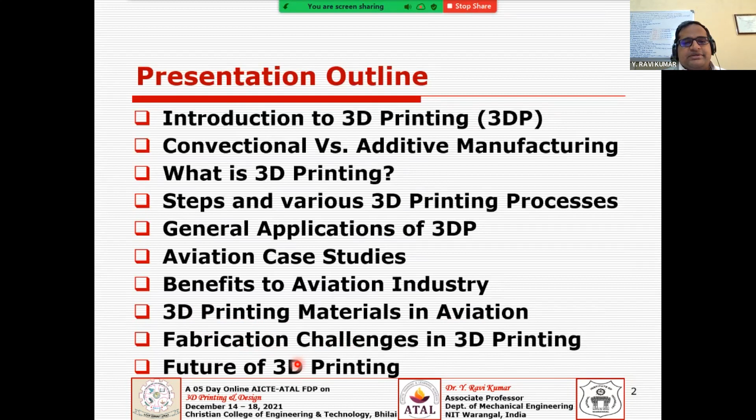And let us quickly understand the importance of this 3D printing, otherwise also called additive manufacturing, and where it fits. So right now we are in Industry 4.0, and Industry 4.0 is all about cyber physical systems and digital twins, where you are trying to replicate your physical facility, how closely you are replicating your physical activity virtually, with more emphasis on the mass customization of products.

So how are you going to achieve that through Industry 4.0? Of course, you do have certain tools to encompass cyber physical systems, mass customization or the digital twin concept: technologies like autonomous systems, cloud-based computing, system integration, simulation, IoT, that is Internet of Things, augmented reality, big data analytics, and cybersecurity or blockchain technologies.

Before we start that, let us quickly compare conventional manufacturing systems versus additive manufacturing systems. Conventional manufacturing systems start with subtractive manufacturing practice like CNC or machining, where

you need to start with a bar stock of material which is in excess of the product that you're looking at, and keep on removing material by using various tools, ultimately ending with the product but with huge scrap or wastage. During this course, we sometimes need to design a fixture to hold the work from the bottom.

We need to look for the logistics or supply chain to produce these components—placing the order for material, tools, jigs, fixtures, and so on, plus CNC programming. The most important thing here is the complexity of the product.

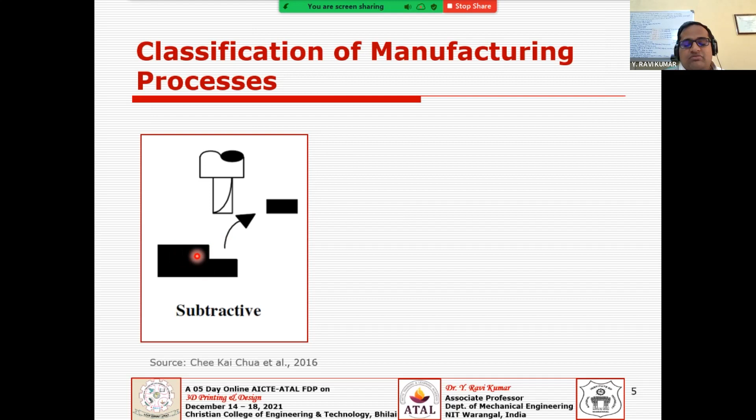If your product is simple, like a step kind of structure, it may not be much of a worry. But if you change your design from a simple step geometry to a more free-form, coffee cup kind of geometry, and you wish to do it in a subtractive manufacturing process,

then you need a big block of material, and you need to look for tools that are deep enough to machine this and remove the material, and what sort of tool it should be. We need to look for several requirements on the tooling side, and we need more than 3-axis control to accommodate this kind of undercut.

That is another constraint—what kind of controllers you are going to use, whether 3-axis, 4-axis, 5-axis, 3.5-axis control, or whatever. You have to worry about this whenever you have an undercut like this.

We need to look for a jig or fixture to hold the part from the bottom to machine it. And if you have a very sharp internal feature, it cannot be machined without tool radius compensation in your CNC program, and so on. So we need to account for all these constraints.

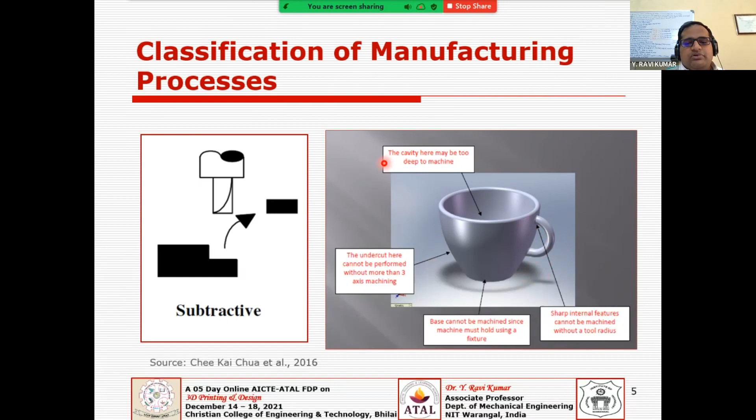But if you come to an additive manufacturing practice, you may not be much worried about those constraints—right from the wastage to the complexity of the geometry. So you can very well work with it.

You are reducing your three-dimensional complexity into a 2.5D dimension complexity—meaning the complexity here is reduced by one dimension, or half a dimension. Then you could even literally remove the wastage, or produce with no wastage or less wastage, able to produce any complex shapes.

So you keep on adding material in a discretized, layer-based manner. You are going to add the material.

So then you may come across other manufacturing processes like a formative process, where every time we need to design a mold or a die of the same shape as the part. Again, you may adopt a subtractive process to fabricate these dies, die inserts, or molds. So it may again rely on subtractive manufacturing.

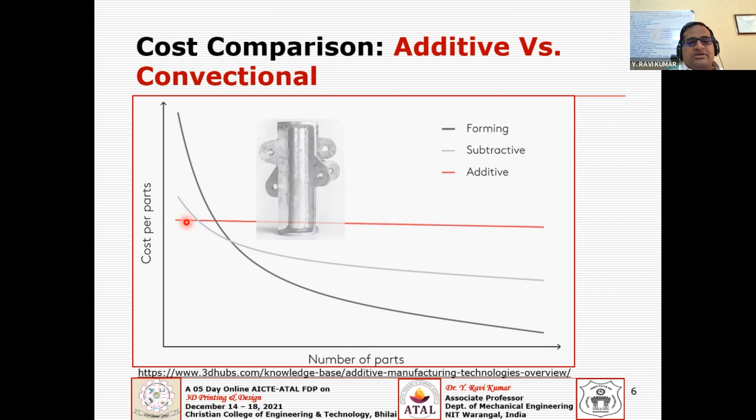So if you have a product with standard circular, cylindrical, and filleted features, it might be done through machining, or welded or done separately and joined, assembled, and ultimately you get this part. That's fine, and it may be very encouraging for conventional manufacturing methods.

But your designer has changed the design from the conventional, ordinary, standard analytical forms or shapes to a more bionic or nature-inspired design. So you may doubt, why do you want to change the design? We are comfortable with this design. Why change it?

Design change is needed very much for adding more value to the product, in terms of functionality and performance. We need to emphasize improving functionality, and even work on other aspects like weight optimization or shape optimization, but the most important thing here is the functional aspect.

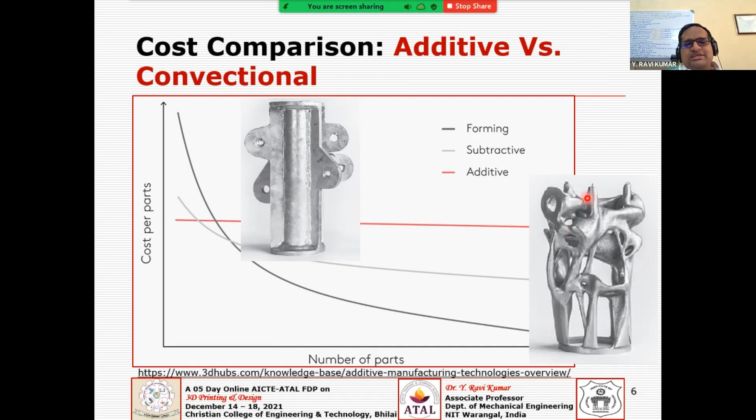But this is where additive manufacturing or 3D printing shines—the cost remains the same whether the complexity has increased to 4x or 5x times. That is the beauty of this technology, as common sense would tell us.

Is it only the cost benefit you get out of the additive manufacturing process whenever you are working with complex products? Not only that, it will also enable you to achieve added value or improved performance of the existing system.

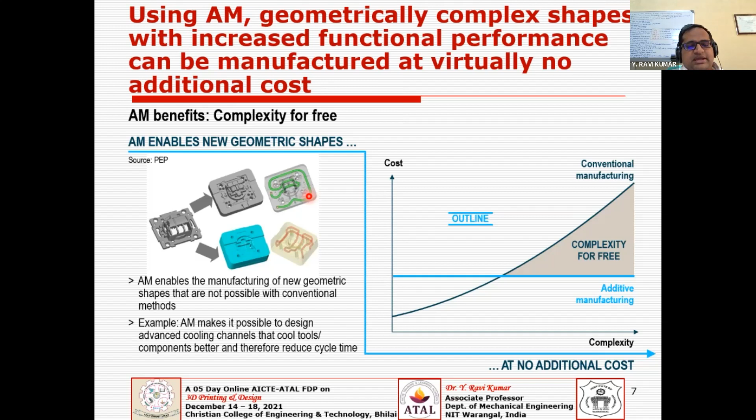That is the more important thing we need to understand. Without any additional cost, you're able to increase the performance of the existing system. That is the capability of 3D printing.

You may wonder, can it be applicable for all circumstances? Wherever you have much more complexity in the product and relatively lower quantity needed, your 3D printing may be the right choice or the best choice. But if you are looking for medium complexity and medium quantity, CNC may be the right choice.

And if you are looking for less complex products with good quantity, you may go with the investment casting procedure to select your method. If you are looking for medium level complexity and high quantity, you may go with the injection molding process.

But there is a bit of collaboration or integration that may also be possible. You can integrate 3D printing technology with the injection molding process, by making an injection molding die or insert directly with 3D printing technology.

As we discussed, conformal cooling channels can also increase the existing performance of the system. It could even be integrated with investment casting, where you can make complex patterns or wax patterns very much needed for investment casting applications. That's the way you can integrate this technology.

Right now we'll focus on the aviation or aerospace industry, how 3D printing is going to play a vital role. Before we start, let us quickly see the mantra or principles, or the unique capabilities of additive manufacturing or 3D printing over traditional or conventional manufacturing methods. The first mantra is undoubtedly, as we just discussed, manufacturing complexity is free.

We have just explained the product with this. Otherwise it could have been a cylindrical object. This may be one of the structural members in one of the structural applications. But here the idea to change the design is to accommodate much improved performance over the existing or traditional design. Because of that, it becomes unnecessarily expensive in conventional manufacturing methods.

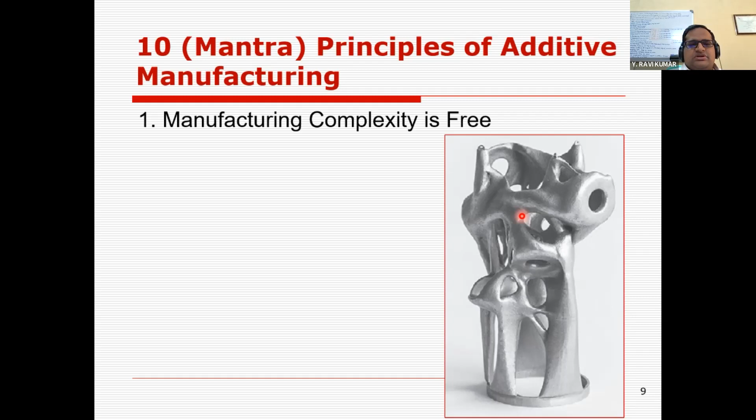But that will be easily tackled here, whether you are making a cylindrical form or you have derived this in the most bionic way of designing it, a nature-inspired or more organic form. It doesn't care whether you are making a cylindrical form, a free form or the most complex form. So your complexity is totally free. That's what we are talking about. And of course, variety is free. What do you mean by that?

Say I have some 100 components, but all 100 components are different size, different shape, different form, and none of the components are matching. If you go with traditional manufacturing methods, we need to talk about CNC. Then we need a different program, different tools, different fixtures. And there will be huge logistics involved in fabricating this, varying from one part to another.

But the biggest beauty here with additive manufacturing is that all these components are made in a single setup, in a single go; it doesn't care what kind of form you are making. Why? Because you are going layer by layer, and you are not driven by the constraints of conventional manufacturing. So your designer's mindset should now inculcate a kind of additive nature. It is quite a contradicting scenario of additive and subtractive, as the names suggest. But we will try to explain that with some case studies.

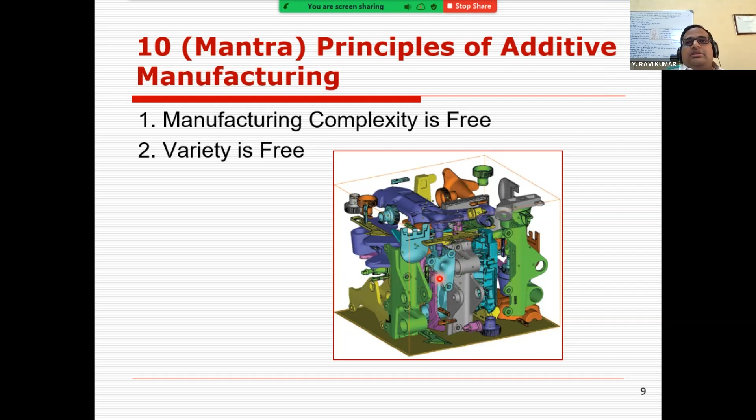But the thing here is that variety is free. Whether you make one geometry or totally different ones, that's where your magic lies. So part variety is free here. That is another mantra. Or the biggest advantage, as we are talking about: no assembly is required. You can take say 12 components and make them as a single part, where you don't require any assembly at all. You can consolidate the part count. So it doesn't require making 20 or 30 parts separately and assembling them.

The difficulty in assembling, the manpower involved, the resources for a separate assembly station or robots, depending on automation. Here you need not invest that much money in assembly; you just make it as a single part. That's another mantra. And then you have zero lead time. What do you mean by this? You don't have the big supply chain or logistics of conventional manufacturing. You need only the digital inventory, the designs, but no physical inventory. So you can reduce your lead time; it's almost zero lead time manufacturing, avoiding the disruptions in supply chains and logistics of conventional methods.

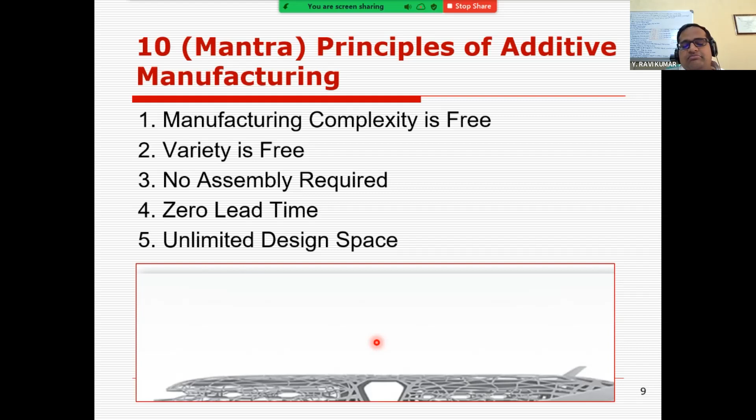And of course, you have unlimited design space, as your designer's imagination should not be a hurdle for the manufacturability of the component. Say your designer has come up with a nature-inspired design; your manufacturing system should not be a hurdle to fabricating it, where your designer has out-of-the-box thinking and comes up with better performance than the traditional design. Undoubtedly you have a lot of design freedom, unlimited design space. And of course, it is zero skill manufacturing.

What do you mean by this? In conventional tool making, or even CNC technology, we need to train people on these sophisticated machines, programming, tool making and all that stuff.

But here the magic lies much on the design side, and the manufacturer's skill is not much needed here. If you contrast with the conventional manufacturing systems, the manufacturer's skill may not be much required here; the focus is on the design aspects, and that design should be in tune with the capabilities. That's what we are discussing. At every part of your design, it should be understood whether you are going to exploit these unique capabilities in your design or not.

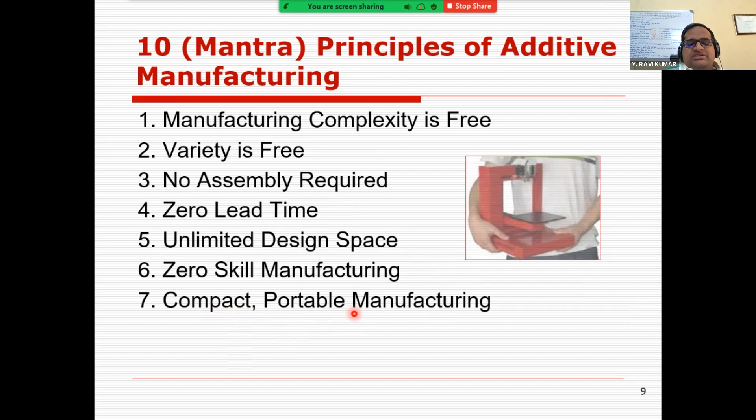And this technology gives an opportunity for more compact, portable manufacturing. You have more compact machines, or printers more compact in size, and you can carry these printers to your place. It's not restricted by your casting lines or shop floors, where we need huge equipment and where you need to go to that place to perform it. But here there is a lot of democracy in printing, fabricating or manufacturing. You can sit relaxed at home and still perform your fabrication process.

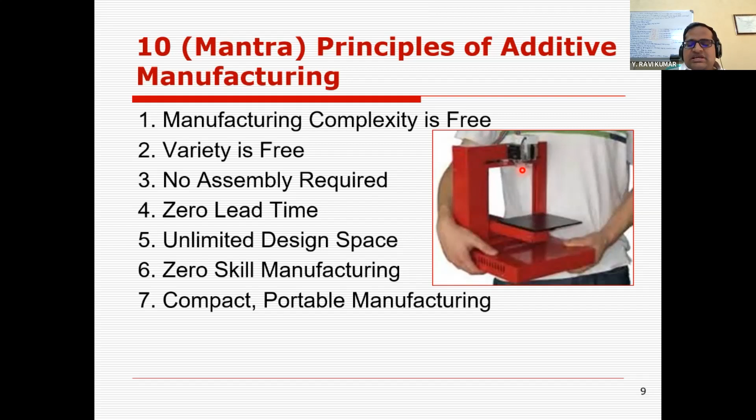So it has a lot of freedom, or democracy, in manufacturing, and less wastage of byproduct. You can have zero wastage or less wastage in manufacturing these components. That is another advantage, literally zero wastage of the byproduct through additive, and infinite shades of the material. This is quite interesting if you contrast it with conventional manufacturing methods.

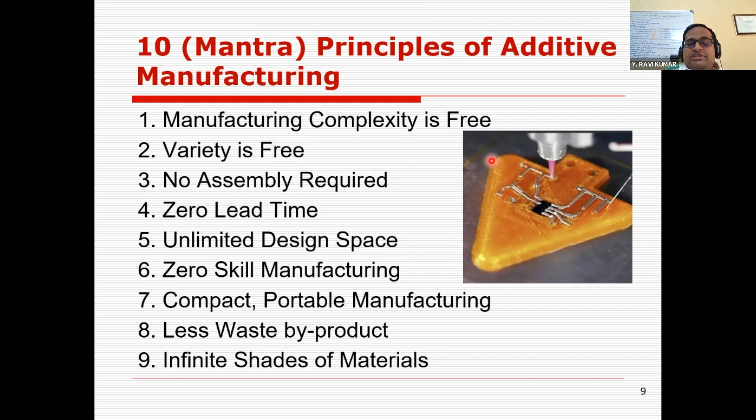You can even fabricate circuitry and non-circuitry material in a single setup, or you can vary the composition, or fabricate a functionally graded material which performs different functionality at different regions within the same component. That is also quite interesting. So you can go with the infinite shades of the material. That is another mantra, the unique capability of additive manufacturing compared to conventional manufacturing methods.

And now we are talking about Industry 4.0, and how precisely the physical replication is done from the virtual, meaning the digital twin concept in Industry 4.0. So it is definitely moving into digitalization of your designs, integrated with the physical world or physical replication, and you can even integrate digitizing technologies with 3D printing. So you can get wonders, or come out with the best outcome, if you integrate these technologies in your manufacturing practice.

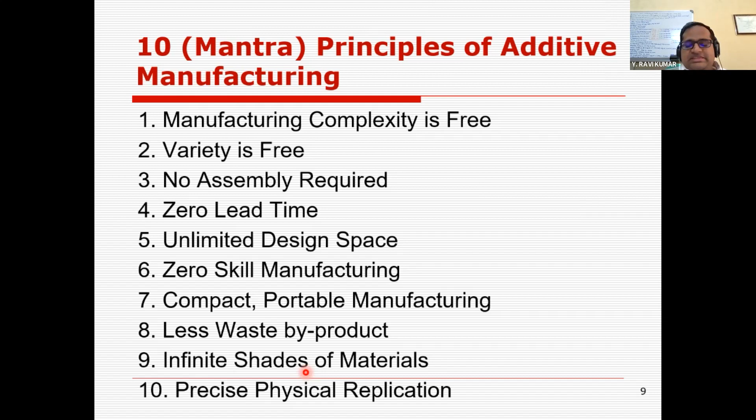So with this background, let us talk about a manifold here. Why I'm quoting this is that it may be relevant to the aerospace application we are going to discuss, or in general, the designer's mindset has to come out from the traditional design mindset. On seeing this, one can understand it is definitely meant for conventional manufacturing. This design is meant for a conventional approach, maybe CNC.

Why? Because you may be worrying about wastage, keeping in mind less wastage. So you are left with a block kind of structure, rather than a shell, or scooping out the material to make it lighter. You may have doubts: sir, why should I change my design? I am comfortable, let it be like this. Letting it be like this won't work. Why? Because you have an intention to reduce the weight of the component. Why do you want to reduce the weight of the component?

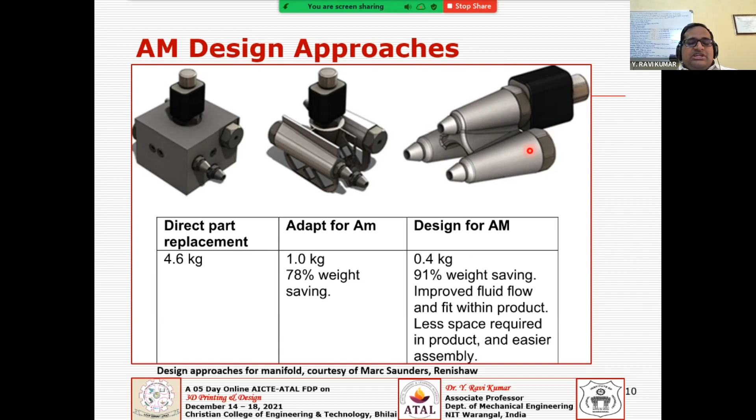And in continuation with that discussion, instead of a solid block design, you have made it a shell rather than a solid block. With this design approach, your 191 hours has been reduced to 36 hours because of the shell base. And further you have considered your support structure, your orientation and other aspects, that is, the constraints in AM, and accordingly you have modified the design, and further the build time has been reduced.

So your machine cost per hour has been reduced, meaning your production cost has been reduced, and material is also reduced, so your material cost is also reduced, and in total your production cost or product cost has been reduced hugely. This is because you are exploiting the unique capabilities of additive manufacturing in redesigning your product. So from the conventional mindset to the additive mindset, you could get these benefits, right?

And now, what is this 3D printing? We can quickly see that. I hope you have already been exposed to this technology. This technology started with the name rapid prototyping, and then you have additive manufacturing, and you have 3D printing, as given by ASTM or Wohlers or whoever. So the idea is the same. You start with the digital data and end with the physical product, or the physical component, and then use it for your application.

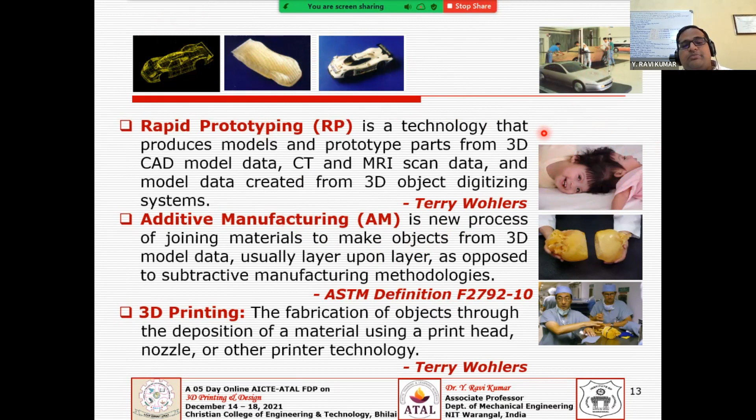Either you come from the CAD/CAM/CAE domain, or the digitizing domain, or a medical domain, where a CT or MRI scan can also be used. But the essence remains the same. You start with the digital data and end with the physical component, and then you get the benefits of this technology. Of course, you may come across different steps. Typically, there are 8 steps that we need to follow in any typical additive manufacturing and 3D printing process.

We need to start with the CAD model, and it should be converted into an STL, that is stereolithography or standard tessellation language, because the interfacing software connected with your machine can understand only this format. You import that STL file into the interfacing software and set up

the machine setup or build setup based on the process parameters that you set. If it is a laser-driven system, you set the laser-related parameters. If not, the software will automatically suggest some default parameters. Then you set all the parameters and it will automatically generate your setup or the commands sent to the machine. Within that machine, the physical realization of your part takes place,

and you remove the part from the platform, or you might have given some supports for ease of fabrication. You remove those and do post-processing to enhance the physical or mechanical properties that you are not satisfied with as built on the machine. You can also remove the supports or loose powder, depending on the type of AM process you're using. So your post-processing method will vary.

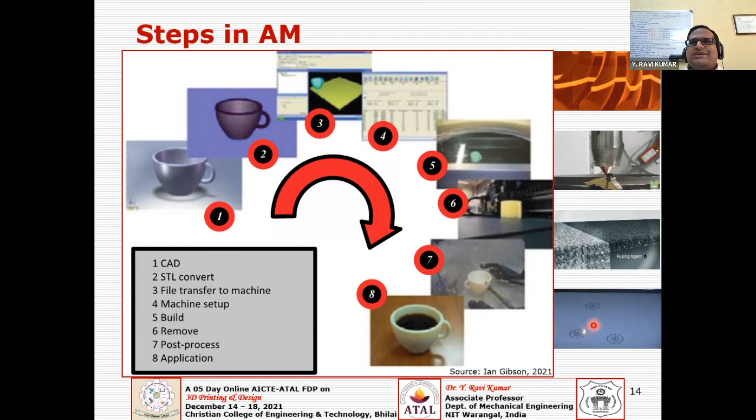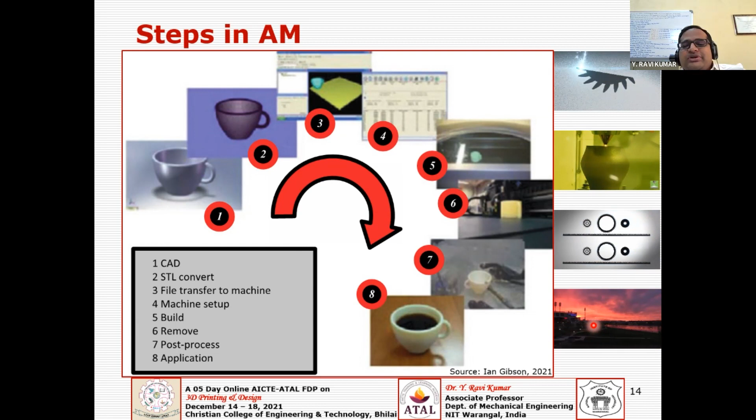We are talking about high-end applications, and material is definitely going to play a vital role here, apart from the design, geometric optimization, material optimization, or your design optimization in tune with the additive mindset, which we are going to exploit anyway. So with this background, let us come to the classification.

Other speakers may be covering these same processes, so I'm not going to talk about all of them. But ASTM and ISO 52900:2015 have standardized 3D printing processes into 7 groups: binder jetting, directed energy deposition, material extrusion, material jetting, powder bed fusion, sheet lamination, and vat photopolymerization. But don't call this technology by other names.

These are the proprietary names, but they have been standardized into a more generic terminology, rather than biasing to any one of these vendors. Normally they developed these technologies and have patents on them, like FDM, SLM, SLS, DLP, SLA, or EBM. These are proprietary or commercial names, but they have been standardized into 7 categories of AM or 3D printing processes.

But a lot of material freedom is one of the magics or the mantra which we had discussed: multi-structured, functionally graded, or varying composition in your product. Or you can even use natural materials, maybe a functional material or a natural material, maybe a biological cell, a blood cell, or a living cell collected from the patient used as one of the materials. So natural material, food grade material, electronic material, shape memory material, apart from your standard engineering materials like polymers, thermosets, thermoplastics, metal alloys, ceramics, and composites.

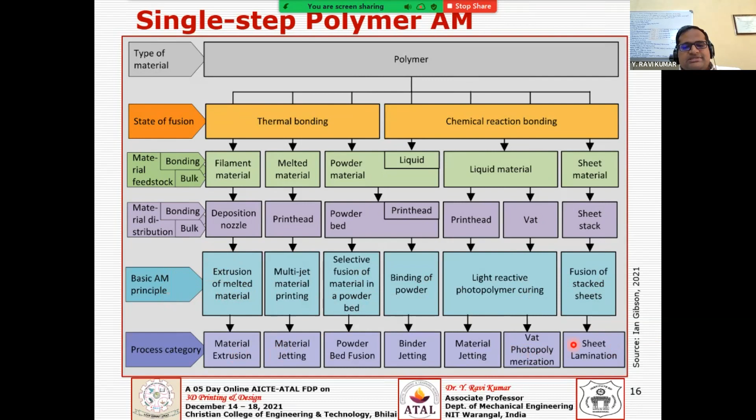So this is single step polymer processing, or you can go with metal also in a single step, but you cannot process all the 7 categories with a single metal. Hardly you can go with 4 processes among 7 in a single step. That is either a melted state, a solid plus melted state, or a solid state fusion, and the feedstock may be a filament wire, a powder, or a sheet material, and the distribution can be done through a nozzle, a powder, or stacked laminates. And the principle may be selective deposition of the material onto a substrate, selective fusion of the material in a powder bed, or the fusion and stacking of the sheets.

And the source of fusion may be an electron beam as energy source, or a laser predominantly, or inductive heating with this principle, or again an electron beam or a laser to selectively fuse the material in the powder bed. Selectively you are sintering it or melting it through a laser or electron beam, or even you use ultrasound. Maybe some solid state welding can also be used. A sonotrode can also be used to join these laminates, and finally you're going to get your part in metal, which is quite straightforward and single step.

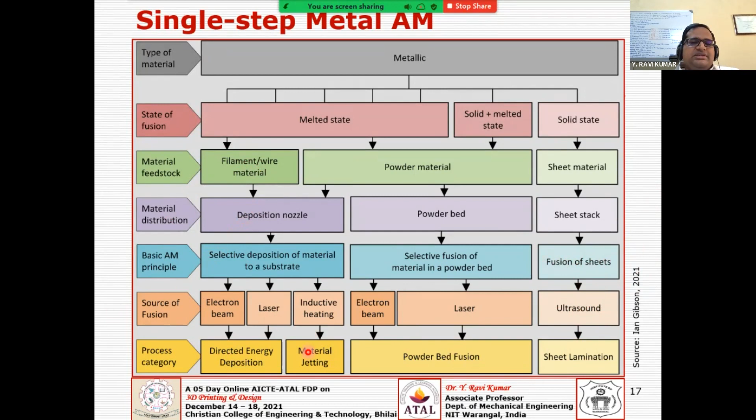Even this can be done through multiple steps, meaning the initial steps remain the same, but you get only the green part, and then it should be subjected to furnace sintering or infiltration to complete to 100% metal, composite, or ceramic, but not in a single step. You should every time undergo a secondary process, the furnace treatment or infiltration. This is mandatory to get 100% of the physical properties of your metal, composite, or ceramic, whatever it is. So it is quite possible, but only with multiple steps.

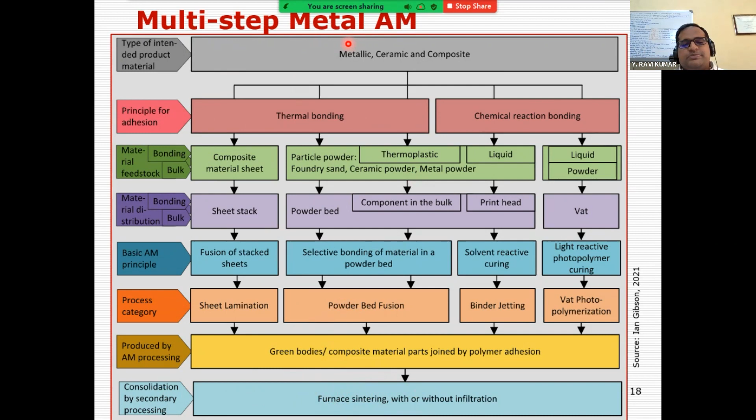This is a bit older, maybe 3-4 years back, but definitely we can see a lot of improvement in aerospace in recent times. Why? Because of a lot of adoption by these aero manufacturers. They are adopting several metal 3D printing technologies especially. They are acquiring, like GE has acquired Morris Technologies to produce aero engine components. So there is a lot of potential to further tap here in the aerospace industry.

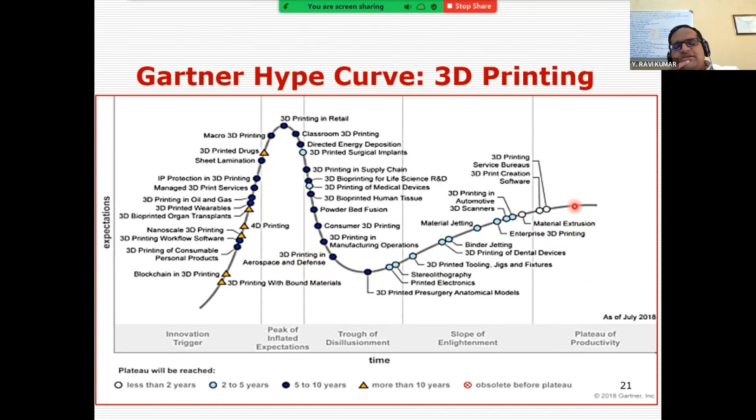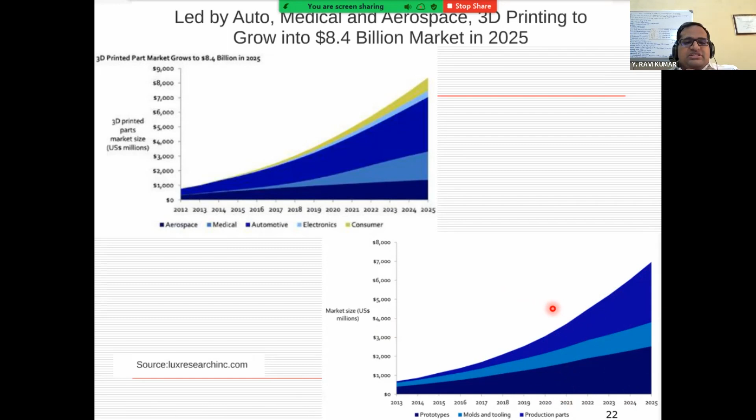And if you see, there is a lot of variety in the products. You have low end products, like you can sit and relax in your home and be able to print some domestic parts right from your bedroom itself. You can print this.

Further, you have desktop based printers, which are much faster than the filament based ones. There is a technology called CLIP, promoted by Carbon 3D, which is much faster - it may be 10 to 15 times faster than extrusion based or filament based technology. There are huge developments happening, even in terms of low end to high end 3D printers.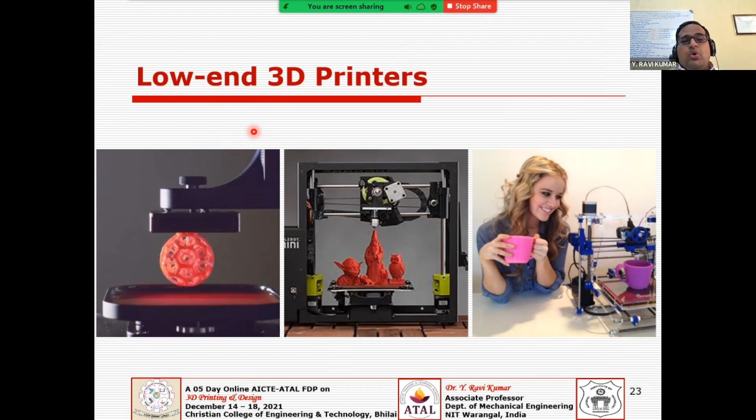You have the industrial printers used for industrial applications. So right from domestic applications to industrial applications, you have a lot of developments in terms of the application of this technology, maybe in aerospace, automobile, medicine, or everywhere where you have much bigger size components.

Technology like DED or wire additive manufacturing systems, where even the entire fuselage of an aircraft can be done through these machines. So that is where this technology is shifting.

You have huge growth, it's not ignored - the growth in desktop based or low end machines to high end machines. So growth is happening everywhere from the low end to the high end 3D printers in recent times.

Can you believe that this is a 3D printer? This has been printed and then, with material changeover, it has been integrated to a robot. So definitely there are a lot of developments happening in this direction.

You have more degrees of freedom. Right now 3D printing or additive manufacturing technology is more based on 3-axis control, but now you have more axes and can produce any curved structures. This is very much needed for the aerospace industry, where you have a lot of aerofoil shapes, whether automobile or aerospace.

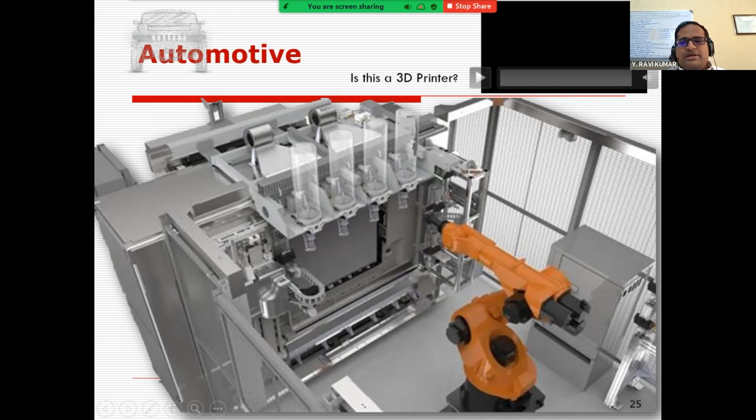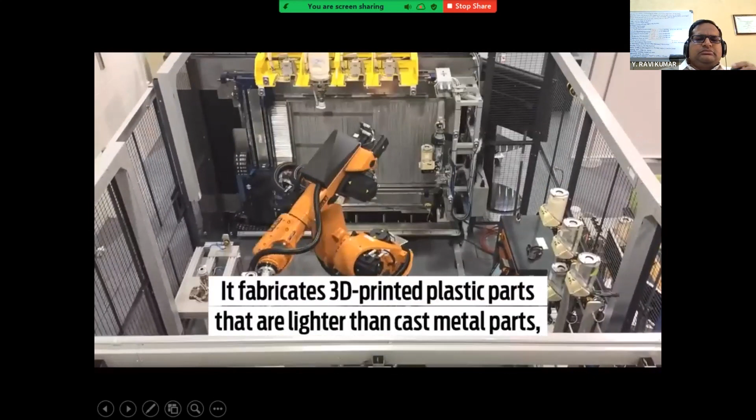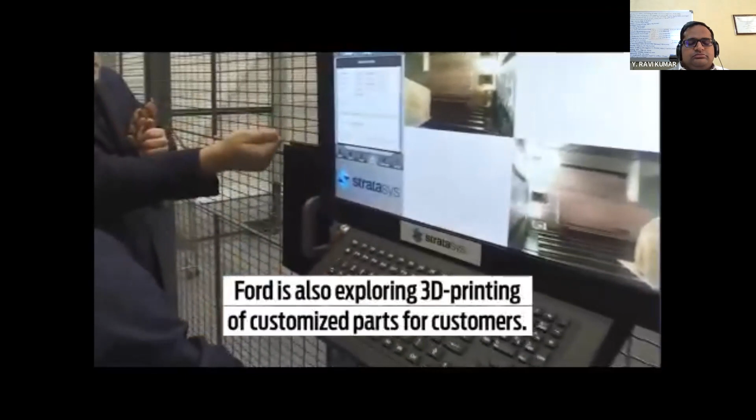I will try to play the video, where it should be further shown. Can you believe that this has been a 3D printed part, this big a sized part, through 3D printing? I'll try to play this video also so you can get a better understanding.

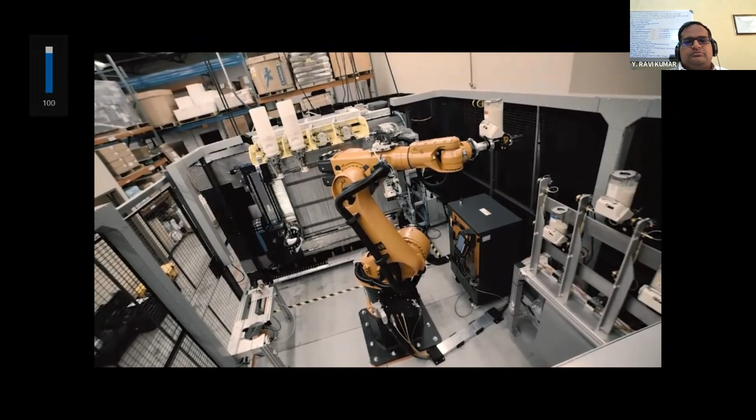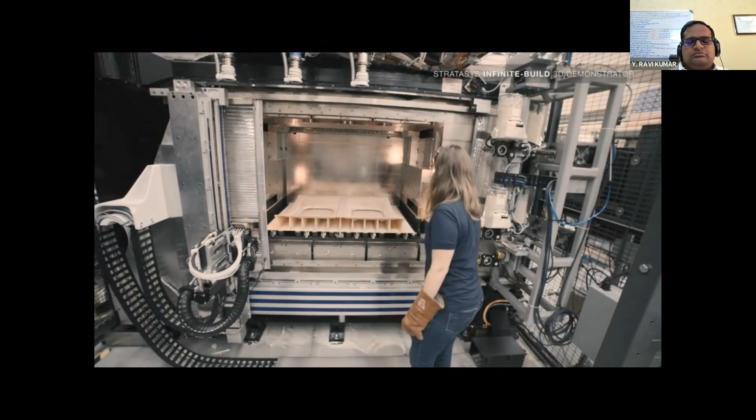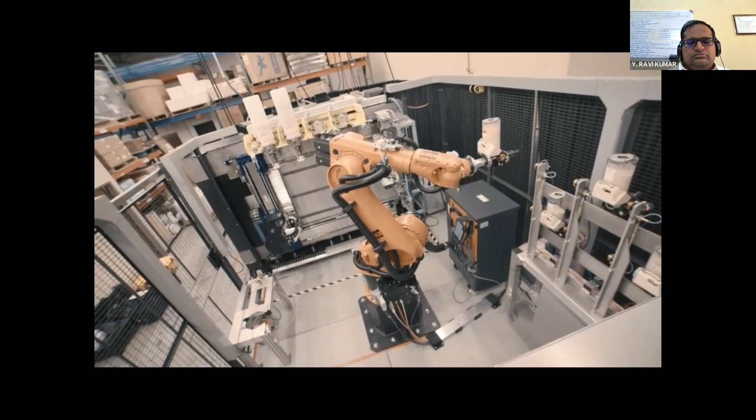For nearly 3 decades, Stratasys has led the way in additive manufacturing, from the prototype labs to the production floor. Stratasys is unveiling 2 phenomenal new technologies: one is Infinite-Build 3D demonstrator, which allows building parts much faster, enabling products that are larger and potentially of unlimited length, opening opportunities for large-scale fixtures and large parts. In the midterm, the materials development side has a lot of opportunity, especially looking at automotive relevant materials that meet all the requirements automotive applications may need. We accomplished this by flipping our traditional FDM technology on its side and combining it with tool changing capability. This has allowed us to achieve speeds of 10x plus from what we know of FDM today. We're producing parts now measured in feet versus inches.

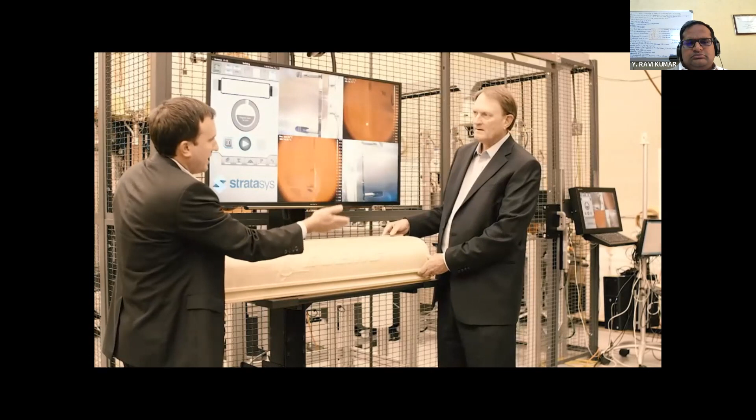We look forward to a large ecosystem which offers large production, stability of processes, and a robust base of design, materials, and structures. In the longer term, we're concentrating on more designing for the function of the parts, so that we could potentially have better function for those parts.

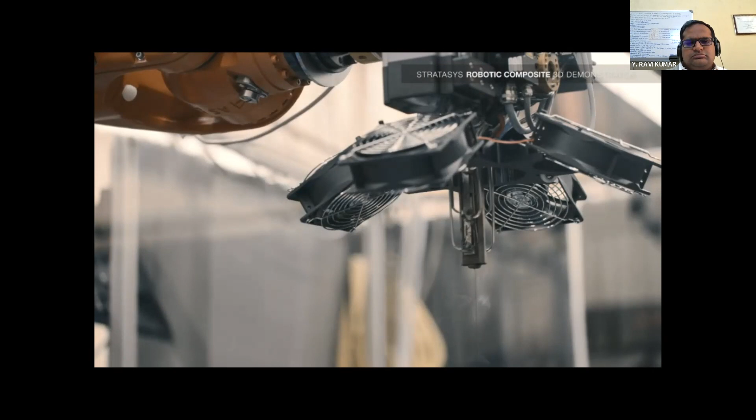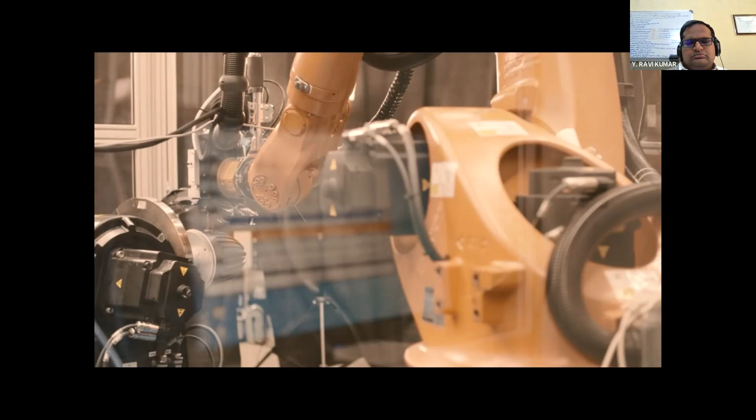The second technology allows us to use a robot to get into areas in a 3 or 5-axis way that's never been done before. It's a very exciting time for additive manufacturing, and Siemens is working closely with Stratasys on the robotic composite 3D demonstrator. With this project, we bring the strengths of Siemens and CNC-controlled robots together with the strengths of Stratasys and FDM, and we elevate it by adding our CAD, CAM, and simulation tools so that we produce a truly unique platform.

So like this, we can produce even bigger structures from this. Either it may be an automobile or even an aircraft, fuselages can also be done through this.

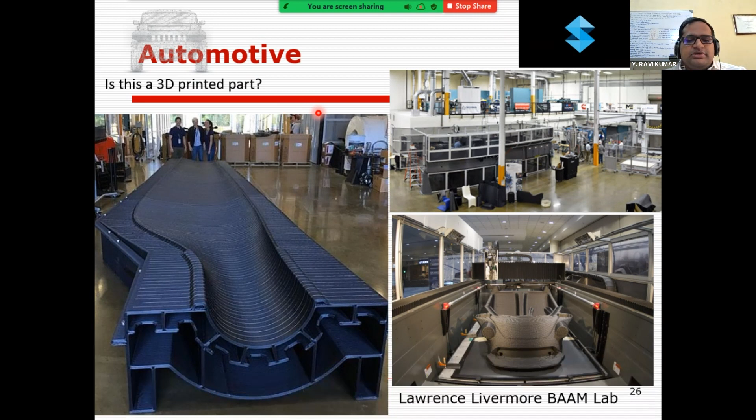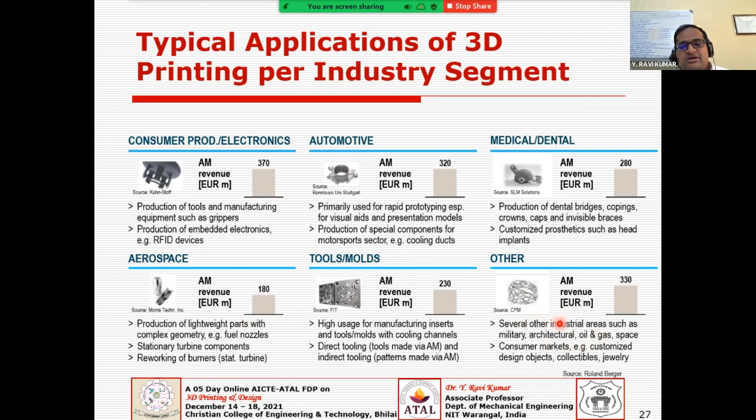Let us come to the typical applications where we'll be concentrating on aerospace applications, but you have a lot of potential in consumer electronics, consumer products, and even the automobile industry just now we have seen, and medical, where you need a lot of customization of dental bridges, copings, crowns. And aerospace, as we understood, needs more lightweighted structures and more complex geometries, and that is very much done through additive manufacturing. So that's where the aerospace industry is adopting this technology. And you do have other tooling and molding industries using this 3D printing technology, or even other applications like military or architectural, oil, gas, and space applications, and even jewelry and other applications.

So then coming to aerospace, you now have huge life cycle saving potential from the aircraft engine. You can even see the trend in recent times, maybe from 2003 onwards, where aero engine manufacturers are exploring metal AM facilities to fabricate these engine components or the structural components of cabin components.

So you have a high quantity of parts that should be done through this additive manufacturing, and it may take performance testing of these parts and certification, and people are on the way to get all that qualification, certification, of these components.

And you have key players that have been expanding manufacturing capabilities to come out with new equipment and acquiring suppliers. As I already mentioned, GE has acquired Morris Technology for producing these aero engine components. And you have series production and manufacturing capability which needs further extension.

And you have a potential volume for the new turbine series that should be several thousands per year. So additive manufacturing is going to play a key role here, with AM components found in multiple engine parts, injection nozzles, or even the production of tens of thousands of a single component per year. That is the demand which is forcing these aero manufacturers to adopt additive manufacturing technologies. And you have a new generation of turbines expected to be launched within the next 3 years, so the manufacturing infrastructure needs to be established in this time.

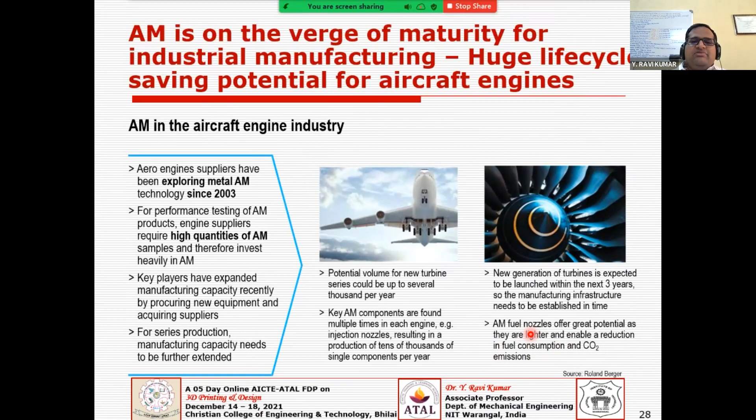But further, you integrate this optimized design and more lightweighted design with the material as titanium, but definitely the cost is high. Can it be justifiable? Yes. So then how do you get it justified? Then only is it meaningful, once you are adapting this technology.

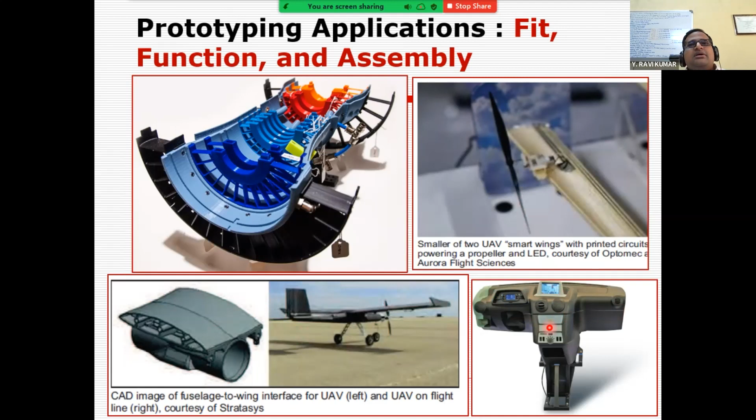So you can add those materials to further exploit these capabilities, or even the pilot dashboard can be further optimized. Nowadays you have toroidal housings made with a polymer material called Ultem, which is lightweight with a high strength to weight ratio. So you can make use of this technology for direct part production, where these parts are used directly for end usage.

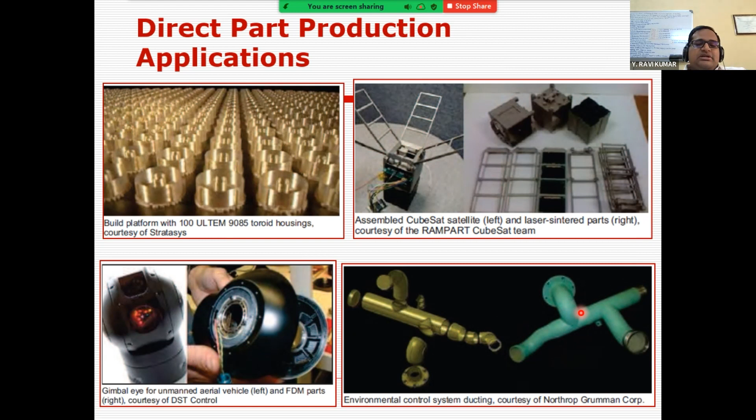And these parts are direct part production, meaning you use metal 3D printers to print them in aluminum, or even Inconel, a nickel based superalloy. These superalloys are possible nowadays. These direct parts may be in aero applications, whether a door handle or even a combustion chamber.

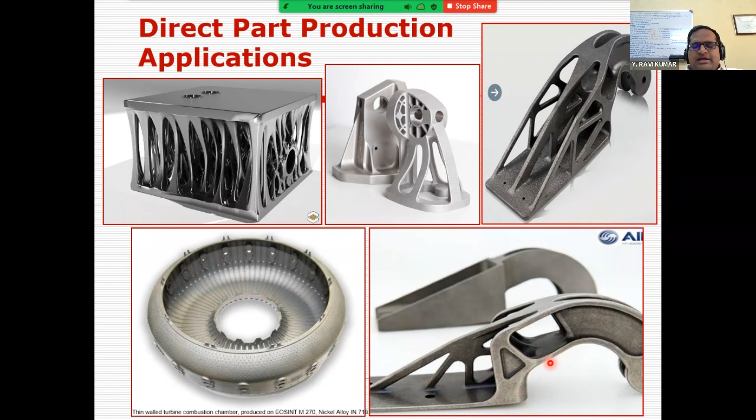But imagine if it is done through conventional machining, there will be 95% or 96% wastage of material. You don't have the luxury to waste 95% of a nickel based superalloy, as far as cost is concerned. So you can exploit those advantages through additive manufacturing, going from traditional design to topology optimized structures for lightweighting and improved functionality. Even impellers and turbine blades used in aircraft applications have been made as direct metal 3D printed parts.

And imagine that these are direct part production applications where people are using this technology. This is one of the very well-known case studies from General Electric, that is the fuel nozzle. This fuel nozzle initially was 20 parts. Now it has been made as a single part.

And there are 19 nozzles in a single engine. You have two engines in an aircraft, so 19 into 2, you have 38 nozzles, and then it has a 25% reduction in weight. And as we just discussed, it's not only production cost saving, but it also saves a lot of fuel in the lifetime of this engine. Then you have 5x durability.

The durability has increased, the weight has been reduced, and the part count has been reduced. More part consolidation has happened, and you have a lot of advantages in the aviation industry that is adopting or integrating 3D printing. You can also see these combustion chambers that have been printed and used in the aviation industry. And not only engine components, it could also be structural components.

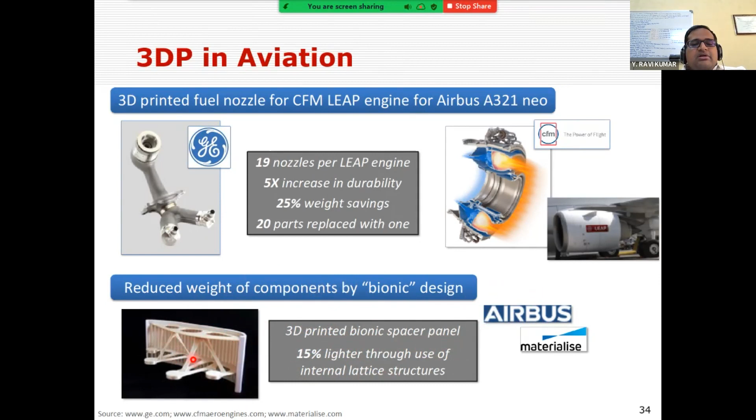The structural components are very much bionic designs, lightweighting structures with lattice-based structures, which can further reduce the weight, say 15% lighter than traditional designs versus the lattice-based design here. And the bionic spacer panel has been used by Airbus in their aircraft. So you can imagine how 3D printing is able to produce these structural components or jet engine components.

And there is one project from General Electric in aviation. They say they started this project in 2015, and just recently they got the certification from the FAA for these components used in the Catalyst engine. One third of the engine parts have been 3D printed.

The advantages are a more simplified supply chain and logistics versus the traditional casting or machining practice normally adopted for fabricating these parts. There is a huge supply chain simplification in product manufacturing, assembly got simplified, and maintenance became much less, because of this adoption of 3D printing technology.

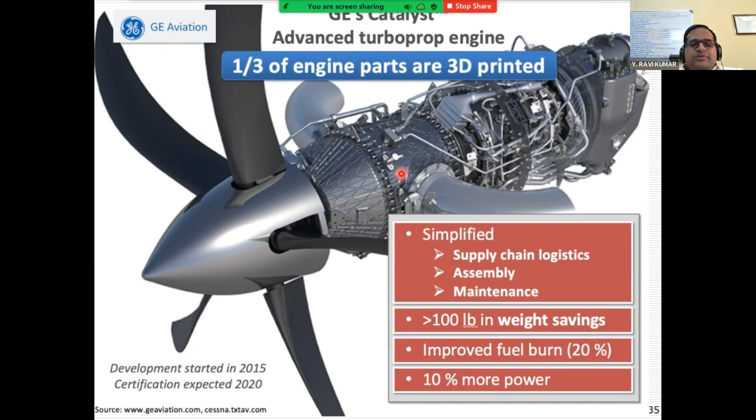And of course, more than 100 lbs of weight has been reduced in this aircraft engine, with 10% more power and 20% fuel burn efficiency. That's an added advantage, with simplified maintenance and operational cost. If you calculate all this, you can better justify these components and why people are able to use this. And of course, you have aerospace rockets.

You have monolithic thrust chambers, a fuel injector thrust chamber made as a single component. And you can see the lattice structure has been adopted here. It serves a double purpose: it promotes lightweighting of the structure, and it also promotes cooling efficiency and performance. It has improved cooling because of this lattice structure.

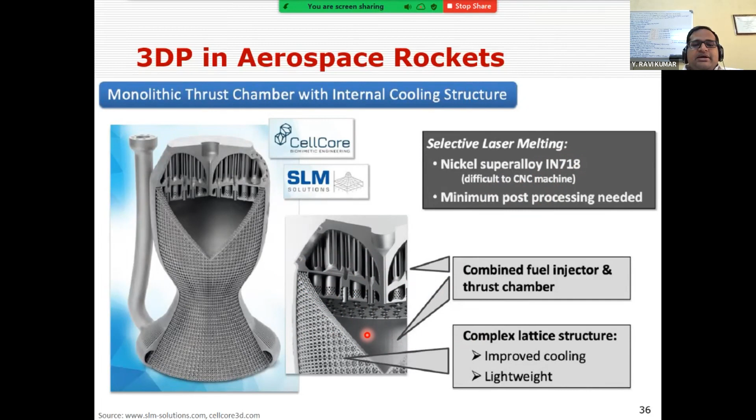That is where the aerospace industry is looking for these kinds of solutions. Otherwise it would have been done through CNC machining with great difficulty on a nickel-based superalloy, that is Inconel 718. But now it can be done easily with more complex structures, with more lattice or bionic designs. So it serves multiple purposes in the product.

But why do you want to invite those troubles wherever you have this kind of structures? Better you make use of this technology and adoption of this technology. And you can see further, here is a traditional design, which is more of a bulky design, or a solid design. It weighs 5.1 kg.

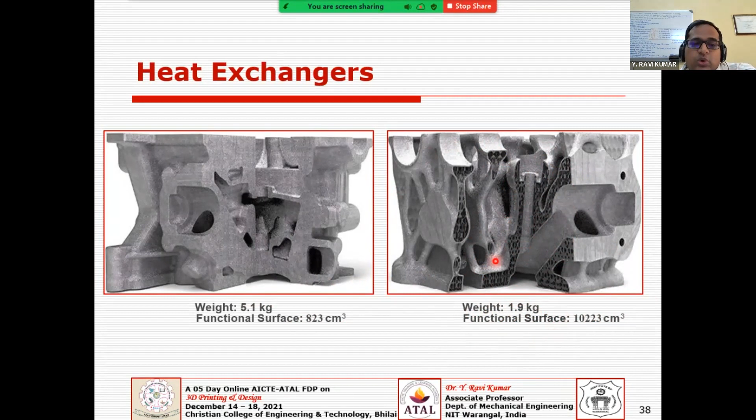One can imagine how the performance of this system has improved, even as the weight has been reduced from 5.1 to 1.9 kg, with almost 11 or 12 times better functional surface area. So one can understand the importance of this in the aviation industry.

And you have the RF antenna. This was the previous traditional manufacturing method. They used brazing, it took 8 months to develop this part, and it consisted of 100 parts in the assembly. But now it is made as a single part through a metal 3D printing system, in a few weeks rather than 8 months.

Now your timeline is not in months, maybe in weeks; you are going to compress your time. And not only that, you get a 95% weight reduction in this component, a 20% reduction in the production cost, and 75% of non-recurring cost has been eliminated. So like this, you can find several case studies in this area.

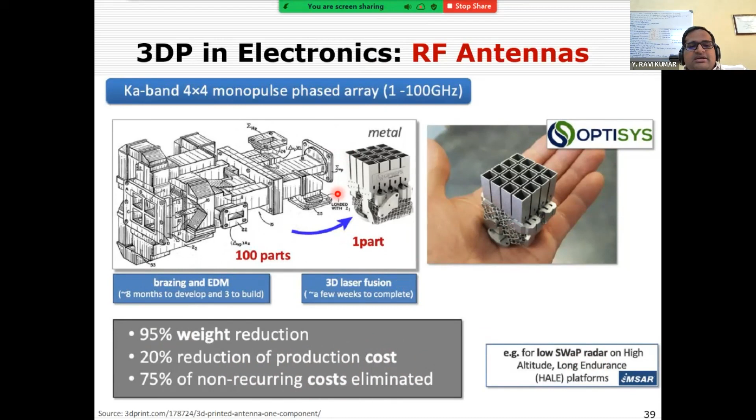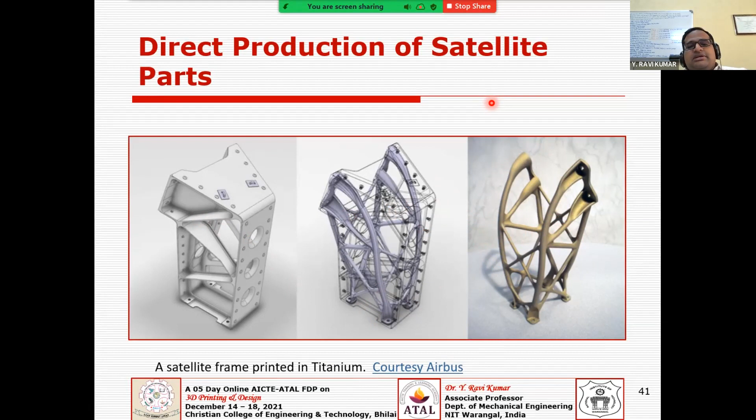And this is another satellite part. This was the traditional design, and through additive manufacturing it is now in titanium. You know the beauty of titanium. It's a lightweight material, and you get both the material advantage, the functionality, and the lightweighting that is very much needed for your satellite or aircraft, aeronautics or aerospace. That will be achieved through this 3D printing technology.

And then you may come across topology optimized structures, bionic or lattice-based designs, or generative designs. You may be familiar with these design philosophies in recent times, which started with parametric and two-dimensional sketching and moved to the more recent bionic, lattice or topology optimized designs. But designing is not the goal. Ultimately we need to fabricate the designer's imagination into reality through 3D printing. It is very well achievable, and it should be done through this.

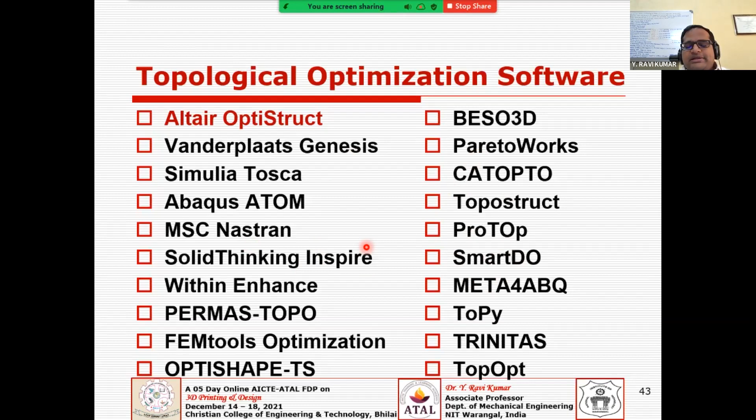You do have software tools to support topology optimization, bionic designs and generative designs. Whether it is an automobile or aerospace component, the biggest advantage, the unique capabilities of 3D printing we discussed right from the beginning, will be further exploited. There are software tools for topology optimization like Altair OptiStruct or nTopology, and other softwares to do this job. Ultimately, it should be fabricated through 3D printing.

Let us come to certain fabrication challenges of 3D printing. We have a lot of scope to work on research problems in additive. One of the areas is multi-physics, multi-scale modeling, which holds a lot of scope. Why? Because there are very few commercial softwares to perform this, and they may target a particular make of machine or their own proprietary machine or material. But we need to do these simulations before going with metal 3D printing practice especially.

Why? Because you don't have the luxury to waste these costly and more precious materials. And then if the design has not been performed, or you have not predicted the defects in your part, then you may end up with a build failure, or maybe a defective part at the end of the day.

That may be because of several reasons, maybe the huge temperature gradient or the residual stresses built up inside because of the large thermal cycles. Why? Because you are operating at 1000 or 2000 degrees C to process, say, superalloys, for that matter an Inconel-based material that you're processing for your aerospace applications.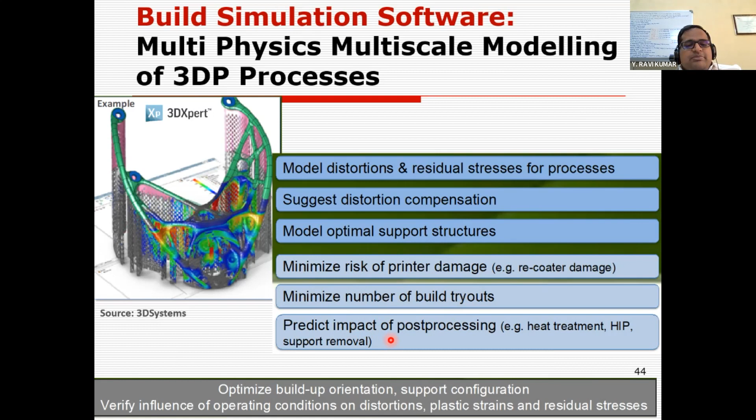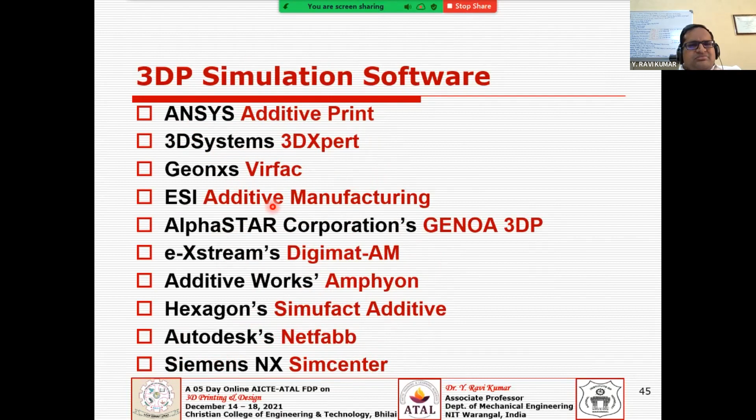like knowing about the residual stresses or stress concentration in the structures or products you are fabricating, and sometimes it may damage your parts also. We need to understand that, and we have certain simulation tools to perform this job nowadays, even from the CAD/CAM/CAE vendors, say ANSYS Additive Print and 3D Systems. We use 3DXpert for doing the simulation, and there are other commercial softwares from Hexagon, Simufact, and to some extent Autodesk Netfabb or Simcenter from Siemens.

And then let us come to the last part of the presentation. What are the advantages of this practice over traditional manufacturing methods? Definitely through 3D printing in aerospace, you can utilize premium materials. You don't have the luxury to waste premium materials like Inconel, aluminum or titanium. Those are costly, and you can have a huge cost saving once you come to additive manufacturing or 3D printing.

And you have another advantage of part consolidation, which we have been talking about. Fewer man hours are required for assembly, so you could have a lot of savings through part consolidation of the structures, and you have a lot of optimization in the geometry, which leads to high performance of the design, not subject to the traditional constraints you normally come across. You balance both through additive manufacturing. And you have lightweight components, which also save fuel over the life of the product.

A simple example is a buckle, or even a door handle, and the same logic will be extended to the underhood components, that is your aero engine components, structural components or cabin components, wherever you have the scope to do that optimization. And you come across companies like GE, one famous example being the fuel nozzle, and SpaceX, who are also integrating 3D printing technology in their practice, Airbus, and several aero players adopting this.

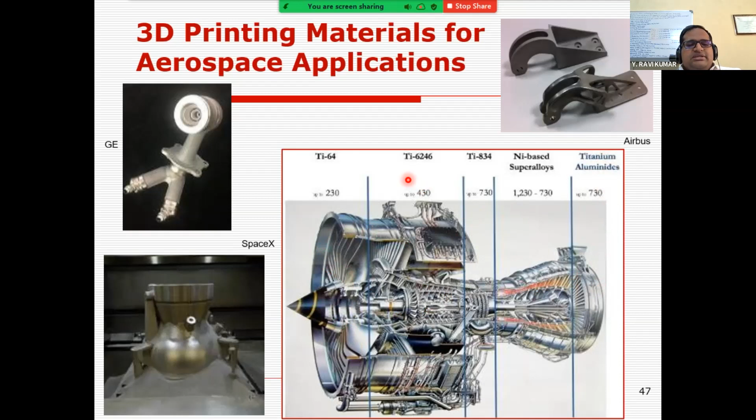Then the material aspect, like titanium 64, titanium 6246, titanium 834, nickel-based superalloys, which can handle many working conditions, and titanium aluminide, which you can use for several parts of your aero engine made through 3D printing. And you see the materials for aero applications, with the application, example and requirement, and of course the recommended AM process versus the recommended material.

So you have the engine compartment parts. For example, nozzle bezels. For nozzle bezels, you have the requirement of heat resistance, a functional part which is very much needed, so the powder bed based SLS, that is the selective laser sintering process, will be used here. And you can even go with glass filled nylon. This is a composite, so glass filled nylon will be used here to meet this requirement. The heat resistance and functional parts have been done through this.

And you have cabin accessories in your aircraft, for example control console parts. For these control parts, the requirement is customized functional knobs. So that is very much needed. Then you have a lot of customization capability through additive manufacturing and 3D printing. That has been done through a VAT-based SLA system, and the material used is standard resin, the epoxy resin, to get the functionality of these knobs and more customized designs.

And you have the air ducts. For these air ducts, airflow ducting is an example, where the requirement is flexible ducts and bellow ducts. These bellow ducts are done through a nylon material, nylon 12, through a powder bed system.

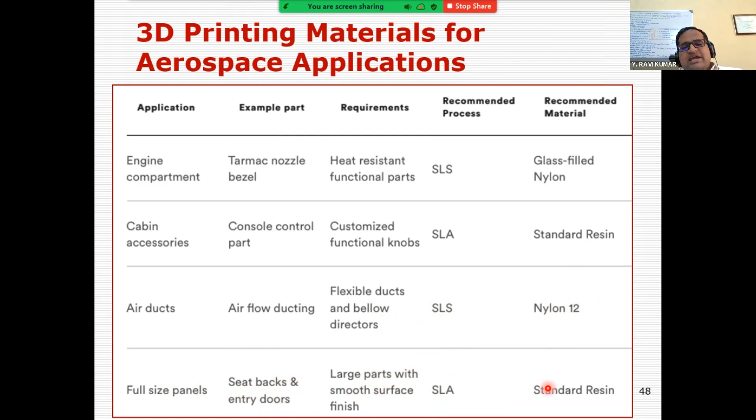And full-sized panels, the seat backs, and you have entry doors. All these are very large sized components. These are large parts with a smooth surface finish. So you can get the best surface finish through a polymer based system, a VAT based SLA system. Standard resins are being used for these full size panels.

And you have the casted metal parts, for example brackets and door handles. The requirement is metal parts which have been casted using 3D printed patterns. So here you are integrating a tooling application. You are using the master pattern, integrating it with the sand casting application. That is, you are making a sacrificial pattern through a castable resin or a wax-based material through a VAT system or a material jetting system.

And then you have metal components. You have some suspension wishbone, or jet engine components. The requirements are we need to consolidate the parts, we need lightweighting of the structure, and we need functional metal parts. So then go with the metal based powder bed system, and go with a material like titanium or aluminum. Then you can get these requirements for these components.

And you have some bezels, a dashboard interface where you will be using those bezels. This is the end use custom screen bezel that is very much needed. That is the requirement. So you have a 100% transparent material, through a digital ABS, which is done through material jetting technology.

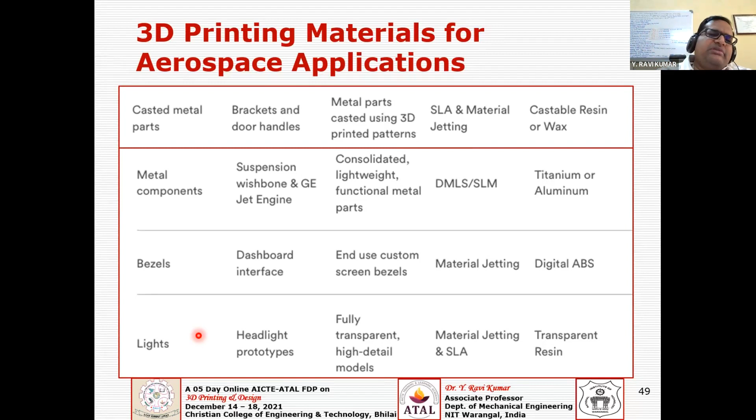So you can name any component anywhere, like a cabin, electronic lighting, underhood, a cabin part, or a structural component. You can find it everywhere, either in terms of a prototype, a tool, a mold, or a direct part. So you can find these applications in your aerospace.

But certainly we have been talking about only the advantages, and definitely we need to talk about the negative shade of additive manufacturing or 3D printing. Coming to the advantages which we have been talking about, it has a lot of freedom for the designer, complexity is free, potentially eliminating the tooling requirement, lightweighting design, part consolidation, and elimination of production steps.

But you do have certain dark shades or disadvantages, like slow build rates. It is not as fast as removing material in a CNC technology; it is still a slow build rate, and the speed, especially the metal printing speed, should be further improved. It does not compare with the traditional rate, but it is not very far from that reality.

And you have high production costs. Yes, the equipment is costly, as well as the material powder which you are using, maybe around 25,000 rupees per kg if you are using titanium.

So you have high production costs of these products, resulting in high cost of the metal printers and metal practice. But polymer printing now is relatively cheap, relatively on par with conventional processes. Still, metal printing is a luxury.

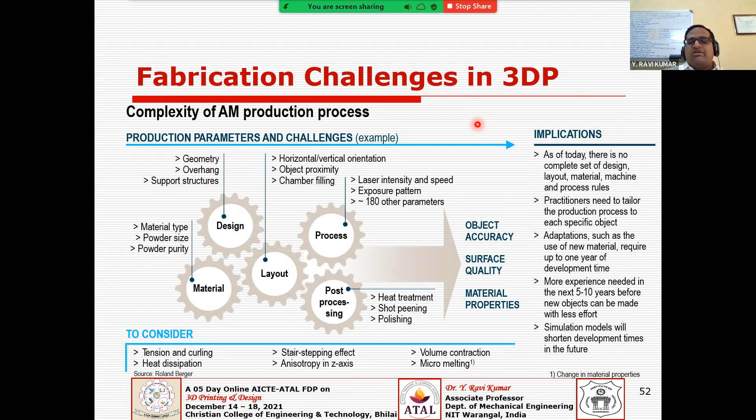And there are a lot of implications which we need to address here, in such a way that it is further industrialized, or reaches the plateau of productivity that we're talking about - but not immediately. Definitely it has to go a long way to adopt these technologies. And then the standardization is another hurdle or challenge.

So to standardize your process, machine to machine or run to run, there will be an inconsistency and the errors may be proven. You need to understand these challenges and address them. Post-processing requirements may unnecessarily increase the cost of production, and how do you minimize this? This is another challenge.

Sometimes 60%, 70% of the total cost may be going towards the post-processing cost, contributing around 60, 70%. But that's not saying anything good about doing such kind of thing. Definitely there will be a challenge here.

And certification and qualification of the parts, and new potential hazards whenever you work with the powder bed system especially. And you have integrity of the digital designs, which we need to secure, because you have a lot of digital inventory rather than physical inventory here.

So we need certain blockchain technologies, cyber security, or cyber laws may be rewritten. Maybe somebody may tamper, or somebody may pirate your designs. We don't know how you're going to protect against that. That's another challenge, and IP protection is another challenge.

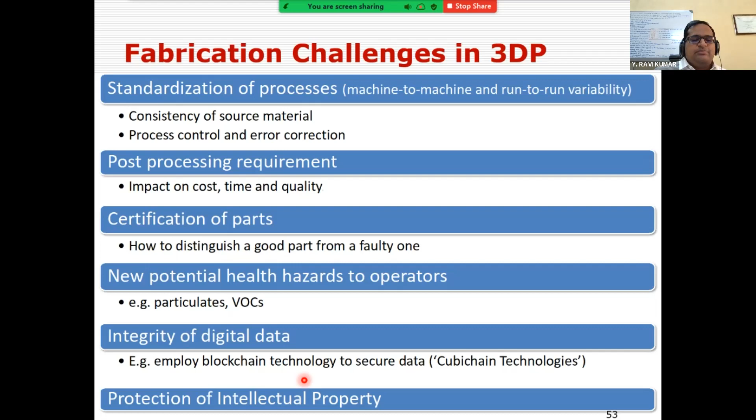So you can keep talking about certain fabrication challenges and some common defects you can come across. Some balling effect because of different surface tensions in the melt pool to the adjacent powder, some keyholes, or chemical degradation or oxidation, which we need to address with some inert environment or vacuuming.

Then you can have cracks formed because of several reasons, delamination with the substrate to the part or within the layers, or a lot of distortions, shrinkage, warpage kind of stuff, inclusions, and poor surface finish, and porosity. So you have several common problems or defects you can come across.

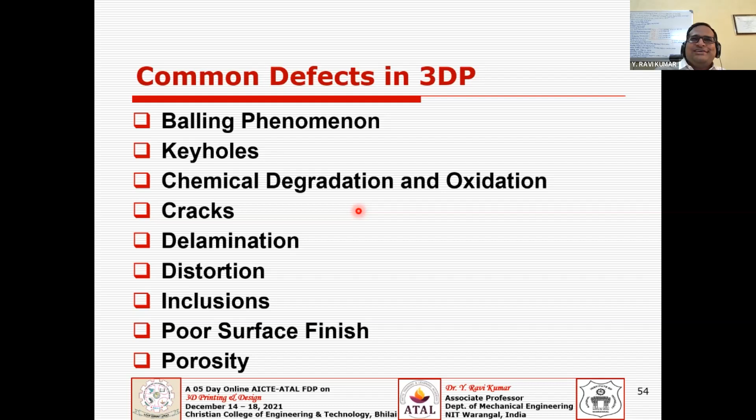So how do you overcome these defects? Definitely it is a kind of challenge for you as a user. Then in a normal flow, you can say 3D printing is just a push button game. Yes, it may be a push button game, but we need to address these challenges. Definitely we need to work on that.

So then only you are the best user of 3D printing technology in a cost-wise justification, or the added value to the product has been justified. Once you take up all these challenges and convert them into opportunities, then you do it. That's where you have to leverage, right.

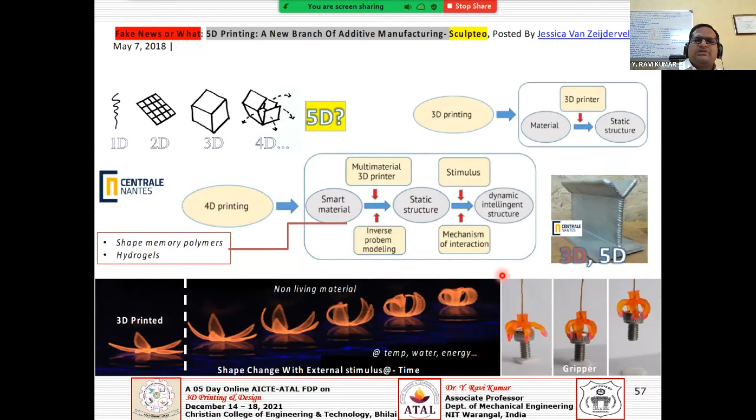So it may be a simple application like unscrewing, screwing, or maybe a life-saving heart stent can also be 4D printed, and it can be used in life-saving applications.

In the future, you can see a lot of scale-down models, maybe micro-sized or nano-sized components can also be anticipated, and more self-healing microstructures, or even EVs or fuel cells can be printed through 3D printing, or digital and analog hybrid structures, or voxel-based printing. It may not be a layer-based approach, but a voxel-based assembly, with an assembler able to assemble millions of voxels per second as the speed of this printing.

So let me conclude my 2-hour lecture, which we started with the introduction of 3D printing in Industry 4.0, its importance in Industry 4.0, conventional versus additive manufacturing, steps involved in the 3D printing process, generic applications, aviation case studies and benefits to the aviation industry, 3D printing materials in aviation, fabrication challenges, and future directions.

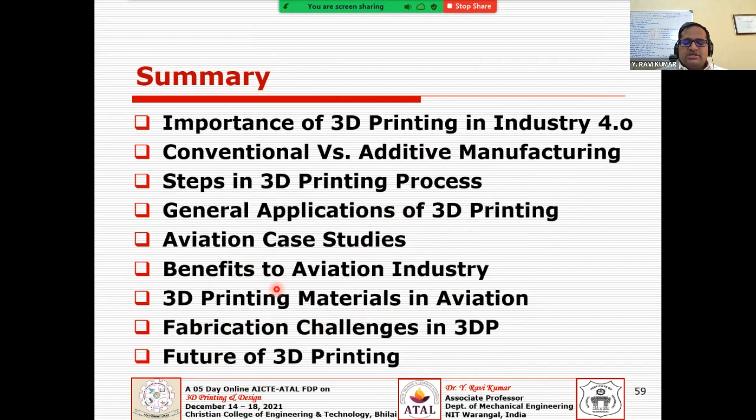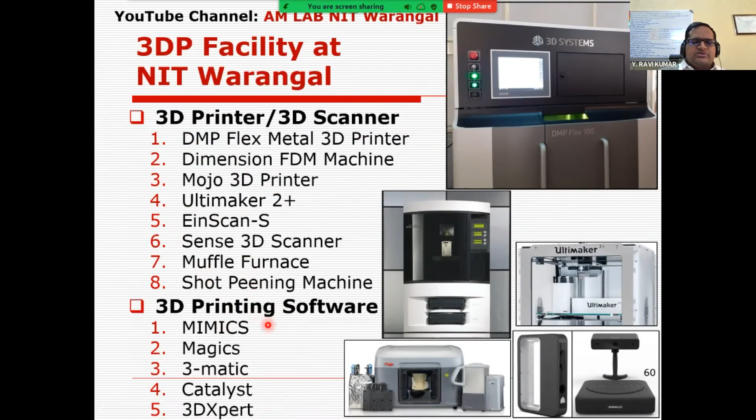These are some of the facilities we have at NIT Warangal in terms of metal 3D printing, polymer printing, and dedicated softwares for 3D printing applications.